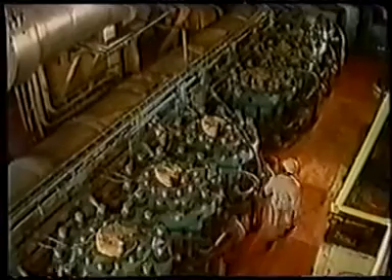The aim of the engineer is to operate the main engine reliably, with low fuel consumption, producing optimum power output, with low maintenance cost, and preferably no breakdowns. The factors which impact on such a successful operation are fuel quality, the correct choice and use of lubricants, and good operational practices, which include an effective condition monitoring process.

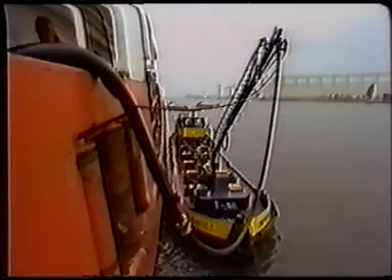In real life, the engineer has to use whatever fuel is delivered to his ship within the laid-down limits. The lubricants available to him are recommended by the engine builders or the lubricant suppliers as the most appropriate for that particular plant. So, both these items are decided for the engineer by others.

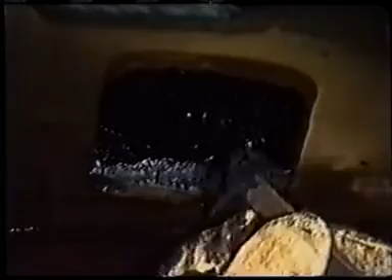The engineer's role begins with his understanding of the processes taking place inside the engine and his knowledge of all the correct operating procedures involved, including maintenance. Understanding these processes begins with a few basic facts about friction, corrosion, wear, and the heat generated by the engine. Knowing the correct operating procedures begins with knowing how to get the best fuel consumption and how to use and store the lubricants on board.

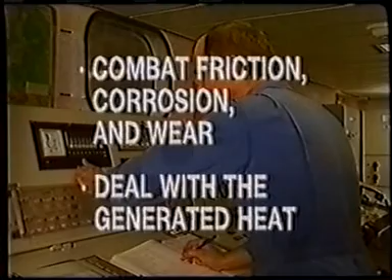The task is to combat friction, corrosion, and wear, and to deal with the generated heat. So let's look at the basics of lubrication in general, but related to the conditions existing in an imaginary main engine. Let's begin with friction. Wherever two surfaces touch and move in relation to one another, there is a force which resists this movement. This force is called friction.

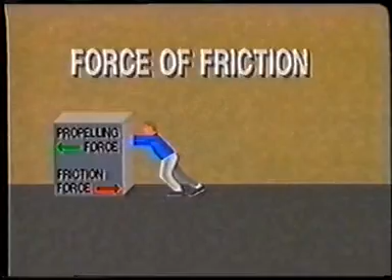Brakes on cars or trains make use of this force to slow them down if they're moving, or to prevent them from moving if they're stationary. Friction occurs naturally everywhere. For instance, between furniture and floor, between piston ring and cylinder liner, even between the hull of the ship and the surrounding water.

Energy must be applied to create movement between these surfaces to overcome the force of friction. Then, more energy is required to accelerate this movement. When movement occurs, the surfaces tend to grind each other down, producing wear. The energy applied to produce the movement will be transformed into heat and motion. The portion of energy used for propelling the surfaces does a job of work, but the portion which simply overcomes the force of friction is wasted energy.

How great the force of friction may be between two surfaces, how much of the energy applied will turn into heat, and how much into motion depends on the pressure one surface places on the other, and on the relative smoothness of the surfaces.

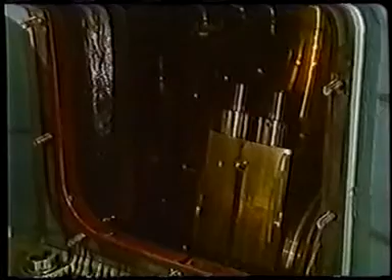The engineer's task in the operation of the main engine is to reduce the friction between moving parts to a minimum, to reduce the wastage of energy, while at the same time preventing the moving surfaces contacting and damaging each other, thus reducing wear. The engineer uses lubricants to perform these tasks. In general, the lubricant forms a film between the surfaces.

As the shaft begins to rotate, the oil wedge lifts it off the bearing surface, attaching itself to each of the surfaces, whilst flowing steadily in the center. This is called hydrodynamic lubrication, which means full fluid film lubrication. When this condition exists, the two moving surfaces do not touch because the oil wedge separates them.

If this film breaks down occasionally due to pressure between the surfaces or excessive heat or lubricant starvation, the surfaces will touch and the lubrication will not be continuous. This is called boundary lubrication. A typical situation where this arises is between a piston ring and the cylinder liner. Hydrodynamic lubrication is more effective because it reduces wear to a minimum. In the case of boundary lubrication, the surfaces may touch and wear may take place.

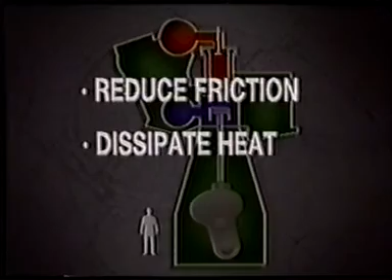Already, several functions for the lubricant have been identified. It must reduce friction, it must dissipate heat, and by preventing contact between the surfaces, it must reduce wear. These functions of lubrication apply across a wide variety of plant operations.

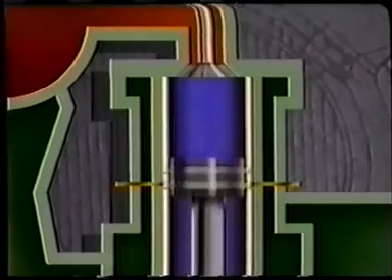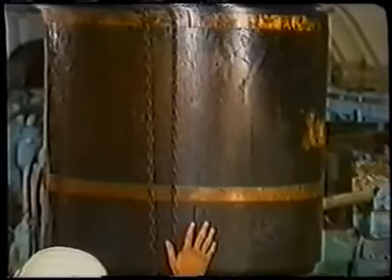To understand how all this is done by the lubricant in a main engine, we need to examine how these various problems arise there. Friction is there as a natural condition between two moving parts. Heat may be present as a result of combustion or as a result of friction. Abrasive wear may be caused by rust particles or metal particles from worn surfaces being trapped between moving surfaces. Also, catalytic fines introduced into the engine by the fuel. Catalytic fines are very fine abrasive particles which enter the fuel during the refinery processes.

Adhesive wear occurs when the boundary lubrication fails to protect the surfaces and spot heat is allowed to build up so that metal-to-metal adhesion takes place, resulting in metal tear and hard particles scratching the otherwise well-machined surface. Adhesive wear is slightly special and only usually occurs in specific areas in special conditions, such as top dead center on the cylinder liner. But because it produces hard particles and uneven surfaces, which help to aggravate abrasive wear, its prevention is equally important.

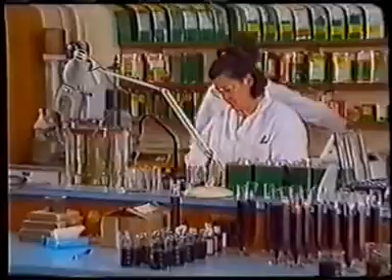Corrosive wear results from the presence of sulfuric acid originating from the combustion processes. Now that we know what problems need to be dealt with, we can establish the properties the lubricant must have to solve them. Marine lubricants are usually liquid or semi-liquid. They may be made of mineral oils, vegetable oils, or synthetic oils. Some additives are also present to enhance certain specific properties which are required for doing a designated lubrication job.

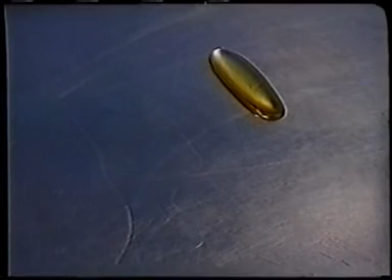For instance, the oil needs to be viscous enough to stick to the surfaces, forming a lubricating film between the moving parts. Why viscous? Viscosity is the liquid's resistance to flow. Water flows fast. Its viscosity is low. Syrup flows slowly. Its viscosity is high. When a liquid flows, it leaves a trail, a film behind. Water leaves a thin film. Syrup leaves a thick one.

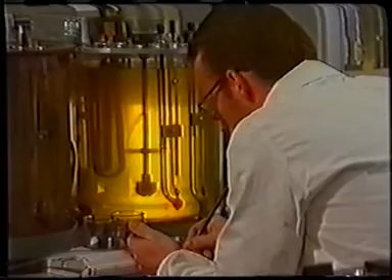All liquids have viscosity, so an oil applied to lubricate some moving parts must have enough viscosity to form the film and flow between the surfaces as they move. In a word, it must lubricate. The viscosity of an oil is measured in a viscometer, which gives the results in centistokes at a measured temperature. This then allows for its classification by an SAE or an ISO number. SAE stands for Society of Automotive Engineers, and ISO stands for International Standards Organization. For example, an SAE 30 oil will have a viscosity at 100 degrees centigrade of between 9.5 and 11.8 centistokes.

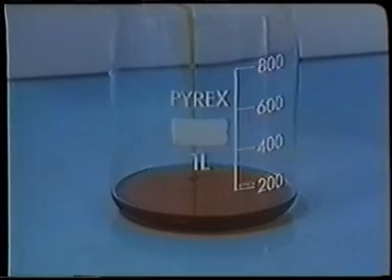This story gets more complicated because the viscosity of a liquid changes with temperature. A slow-flowing oil at 40 degrees centigrade will become a fast-flowing one at 100 degrees centigrade. Some oils change their viscosity more, some less. So a viscosity index, or VI, is used to show how much an oil's viscosity may vary at different temperatures. A low VI number indicates a large change. A high VI number, a smaller change. A 75 VI oil will change quite a lot. A 150 VI oil, much less. It means that when using an oil for a job, its viscosity must be right throughout the temperature range of the job cycle.

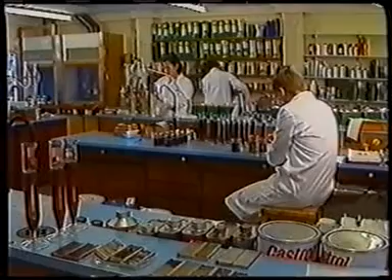The first cardinal rule of good operating practices on board ship is beginning to emerge. Because of the many different lubricants available, with a whole range of viscosity and viscosity index, only the right lubricant must be used for each application. So, such a base oil is ready to perform the basic function of lubrication. This oil will be developed by the use of additives to meet a specific application.

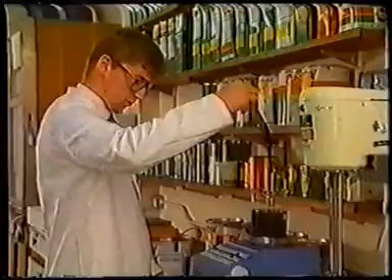For engine application, the oil must prevent wear due to corrosion and deal with the acidic condition inside the engine produced by combustion gases. This is why an alkaline additive must be mixed into the oil to deal with the acidic condition. The oil's total base number, or TBN number, indicates the level of alkalinity present in the lubricant. A low number, such as 15, indicates low alkalinity. A higher value, such as 70, indicates a higher alkaline lubricant.

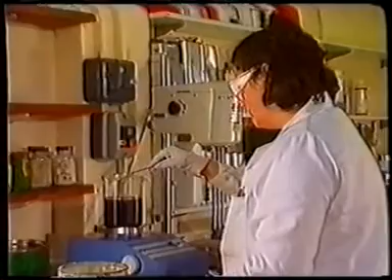When the oil gets hot inside the machine, it absorbs oxygen from the air. Oil oxidation is a problem because when oil combines with oxygen, it thickens and organic sludge and particle deposits may form in the oil. When this occurs in engines or compressors, it can cause serious malfunction. So the lubricant must resist oxidation. Antioxidant additives are mixed into the base oil, and here the oil is tested to find the optimum level of antioxidant additive required for a designed function.

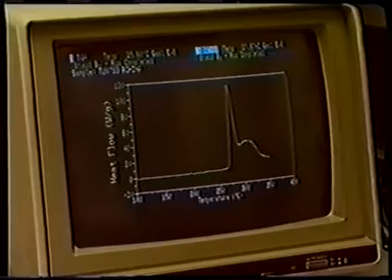Water may enter the engine in various ways and may encourage rust formation on metal surfaces. This is dangerous because rust damages the machined surfaces and breaks up into hard particles, causing abrasive wear, and where it originated, it causes corrosive wear. That is why the lubricant must prevent rust formation and why anti-rust additives are required.

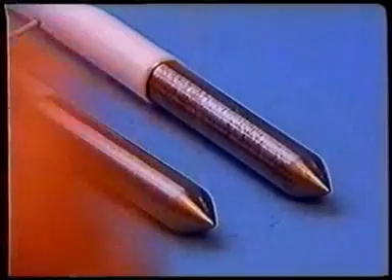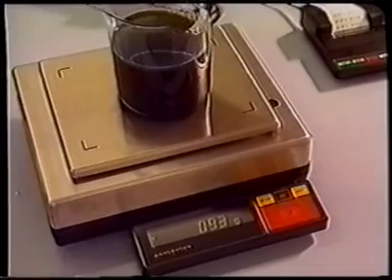The lubricant is churned inside the engine and foam can form. Anti-foam additives lower the surface tension of the oil, bursting the bubbles, allowing the foam to break down quickly. High temperatures and pressures encourage the rupture of the lubricating film, which needs to be prevented if possible. So anti-wear and extreme pressure, EP additives, may be added to the lubricant.

The oil is then subjected to an extreme pressure test. Its effectiveness is tested until destruction, until the test metal parts melt and are welded together.

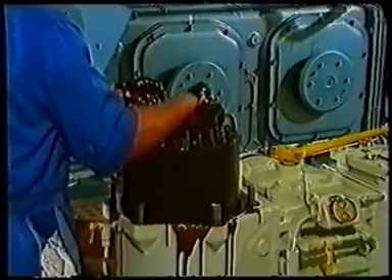Finally, but not conclusively, the contaminating particles need to be transported away from moving parts, and these parts need to be kept as clean as possible. So, detergent and dispersant additives are also added, which help to clean the engine and keep the particles separate and suspended in the oil until they're removed by filtration or centrifuge.

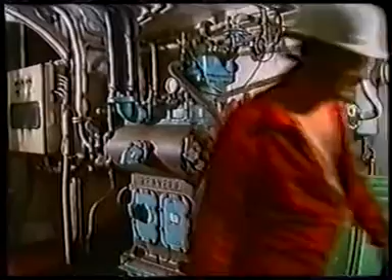So now we are far away from a simple oil used simply to provide lubrication. Each machine will have its own specific set of operating conditions and corresponding lubrication needs. A refrigeration compressor will have completely different requirements for its lubricant from that of a high-performance marine diesel engine.

The cardinal rule of successful operations, as far as lubrication is concerned, is reinforced. Only the correct lubricant must be used in each machine. This is where the lubricant grading and specification systems are helpful. The most relevant ones for a marine engineer are the SAE and ISO grades.

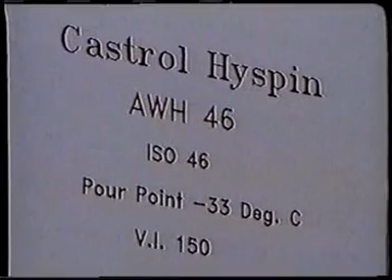Other specifications cover a range of performance levels, such as the API, American Petroleum Institute. Various military specifications require that the oil is subjected to a variety of clearly defined and closely controlled engine tests. Machine manufacturers will also provide a list of recommended lubricants for their products, and these must be strictly adhered to for best performance.

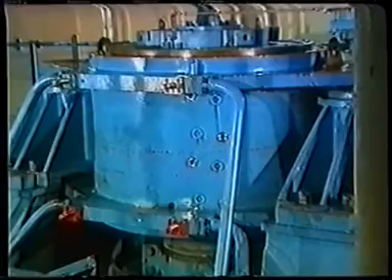On board ship, there are a variety of lubricants used for engines, compressors, transmission units, hydraulic units, turbines, and so on. As each machine will require a different kind of lubricant, they must not be mixed or substituted by any other lubricant than those recommended by the machine's manufacturers.

Lubricants must be correctly stored in a clean environment and correctly handled if they are to perform to their specifications. If they're stored in a cold place where the oil may cool below its pour point, the oil may become solidified. If it's stored near a heat source, it may become heated near to its flash point and become an explosion hazard. Preferably, drums should not be stored on deck, as they might take in moisture, which will reduce the efficiency of the lubricant.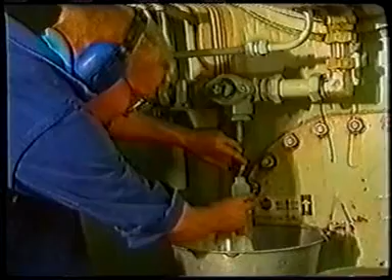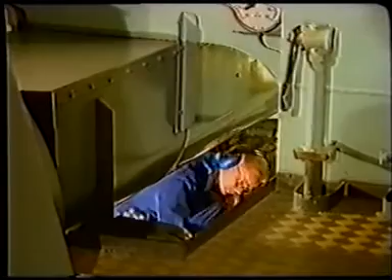The lubricant needs to be inspected and cleaned by filtering and centrifuge during its service life, according to manufacturers' recommendations. Finally, oil samples may be taken periodically from the lubricant in use and sent away for trend analysis to a laboratory on shore. There, the contaminant and metal particles in the oil are analyzed and quantified, and a picture built up of the state of health of the machine using that lubricant. Oil sample analysis is dealt with in greater detail in Program 2.

To conclude, good lubricant management on board ship is vital to effective ship operations. The most important steps an engineer must take in lubricant management are: bulk oil must always be bunkered into the correct tank and in the correct ascending order of TBN value. Delivery notes and oil samples must always be checked to ensure that the right oil has been delivered.

Eliminate water ingress into the lube oil from piston cooling leakages, oil cooler leakages, jacket cooling water entering the crankcase, purifier seal water, and excessive water level on engine tank tops. Check pipework for leaks and failures. Check drains and filter cocks are not being left open. Check tank gauge glasses are not broken, or that reading cocks are not jammed open. Send good lube oil samples for routine analysis regularly.

Most losses and contamination of lube oil result from careless handling. Take great care that you handle and use lubricants correctly. Finally, the cardinal rule again. Only the right lubricant must be used for each application. View this video again and use the accompanying booklet to remind you of these very important basic factors of marine lubrication.

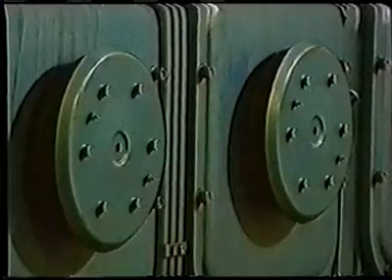In Program 1 of this series, the basic principles of lubrication, the functions of lubricants and their main components were discussed in general terms. From this basic look at lubricants, the most significant rule in marine lubrication has emerged. With so many different lubricants used on board ship, designed for particular applications, great care must be taken not to mix lubricants or use the wrong type for a given application. Serious damage can occur if this rule is disregarded.

This program deals with specific lubrication areas in slow-speed crosshead engines and in medium-speed trunk piston engines to promote good operational practices and to help achieve the best results from the lubricants used. Good operational practices concentrate on the choice of lubricants for each application, the selection of optimum feed rate for cylinder lubrication, and the cleaning and testing of the lubricants during their operational life.

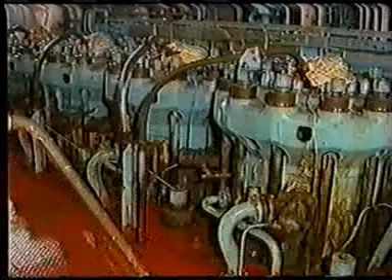The lubrication of a slow-speed crosshead engine involves three distinctly different areas. A, circulating system lubrication, which takes care of the bearings and moving parts in the crankcase. B, cylinder lubrication system, which takes care of the lubrication between the liner and the piston rings. And C, the lubrication of turbochargers, hydraulic governors, hydraulic exhaust valve actuators, and the turning gear. All of these may use different lubricants.

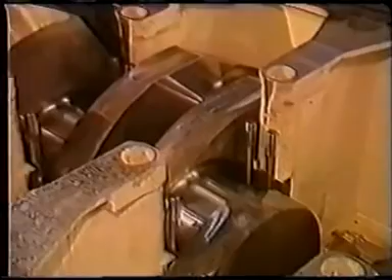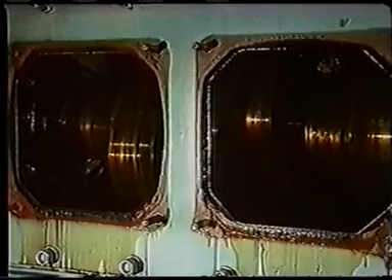The circulating system oil is there to lubricate the moving parts of the running gear and provide the drive for the control system. Typically, this would be an oil of viscosity grade SAE 30, having a viscosity index of between 80 and 100 and a low TBN number. The oil should resist foam formation and possess good water separation characteristics. The engine manufacturer's manual will contain recommended lubricants.

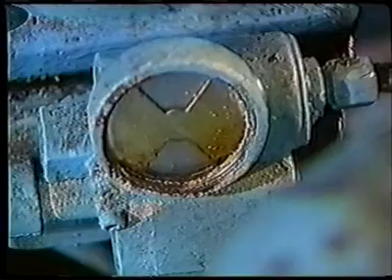Besides lubrication, the lubricant will transport contaminants and metal particles as it circulates, which then need to be removed. This is best achieved in a centrifugal separator, working in bypass, drawing oil from the oil drain tank and returning it there after cleaning. The application of inline filters also helps to remove some of the contaminants.

The ingress of water into the system is always a danger, and frequent checks should be carried out on the system oil to ensure an early detection and removal of water. This is most important, as the presence of water increases the risk of corrosion as well as microbial contamination of the oil.

The water must be kept out or removed totally as quickly as possible from any system oil. Again, systematic centrifugal cleaning will lower these risks. Typical sources of contamination may be leakage from the cooling system and from the centrifuge sealing water if not operated correctly.

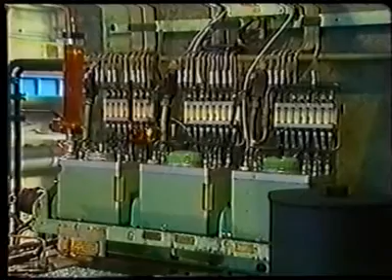The cylinder lubricating system uses a different type of lubricant, as the job it is required to perform differs from that of the system oil. The cylinder lubricant must be of a higher viscosity so that it can form a good lubricating film between the liner and the piston rings. It must also withstand the heat variations in the combustion area and must deal with the combustion products. Under normal running conditions, an alkaline cylinder lubricating oil of SAE 50 viscosity is used.

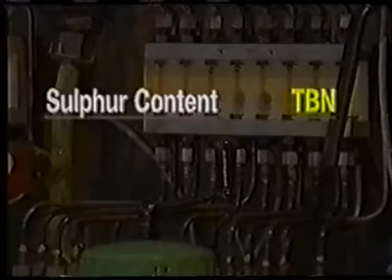The alkalinity or TBN value of the oil is related to the sulfur content of the fuel used. Typical values may be, for sulfur content of 0.5 to 1%, between 20 to 25 TBN. For higher sulfur content over 2%, the TBN number may be 70 or higher.

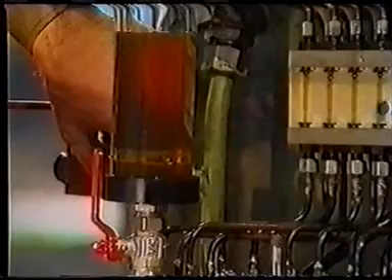Once the correct cylinder oil is chosen, the correct feed rate must be established in accordance with the engine builder's recommendations. The feed rate has a critical effect on good engine operation, apart from the question of oil consumption. With too low a feed rate, the danger of the oil film breaking down, causing undue wear, is much increased. The correct feed rate will allow the formation of the lubricating film between the liner and the rings, and will reduce the effect of its breakdown at piston reversal points.

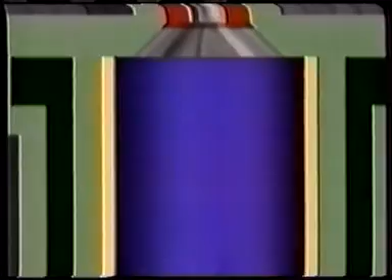The use of heavy fuel oil with high sulfur content is making the job of the cylinder lubricant very difficult. Even high alkalinity oils cannot hope to neutralize all the sulfuric acids which are produced during combustion. The cooling system must be operated so that the cylinder liner temperature is not dropped below the temperature at which the sulfuric acid may condense out on it.

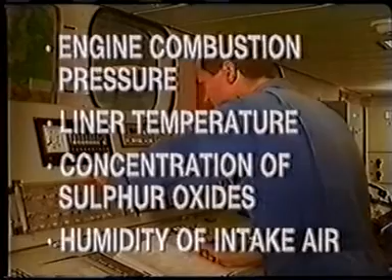Acid condensation depends on the engine combustion pressure, the liner temperature, the concentration of the sulfur oxides, and the humidity of the intake air. So the engineer must ensure that the moisture content of the intake air is meticulously controlled, and that the temperature of the cylinder liner is kept high enough to prevent acid condensation.

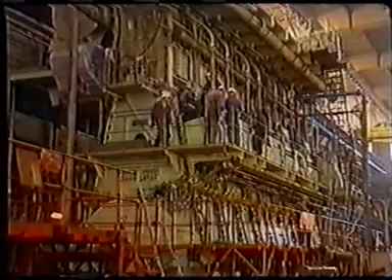The way an engine has been run in after commissioning or an overhaul is critical to establishing good cylinder lubrication. A good run-in procedure will create a good wear-in of the cylinder liner and piston ring. A good seal is obtained between them where a thin oil film provides reliable and effective lubrication. To achieve this running-in performance, a running-in cylinder oil may be used.

The period of running in should be decided upon in accordance with the engine manufacturer's recommendations. Even if only new rings have been fitted, the running-in procedures should be as near as possible to that recommended for new engines. During the running-in period of a new engine, the feed rate should be high. After running in, the feed rate is gradually adjusted until the recommended feed rate is reached.

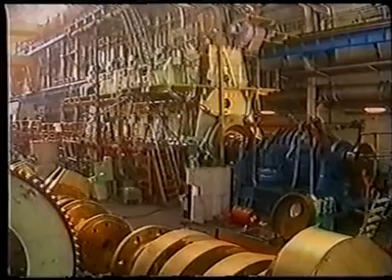The use of the correct lubricant and the correct feed rate for the engine load will help to achieve the best results from a cylinder lubricant. The lubrication of ancillary equipment of the main engine will be discussed in Program 3.

Due to vital design differences, in the case of medium-speed diesel engines, the cylinders are open to the crankcase. This means that the crankcase oil can be contaminated by corrosive combustion products. The chosen system oil must deal with these contaminants as it lubricates the system. The lubricant must also maintain effective lubrication under high mechanical and thermal loads, and must transport solids from the cylinder to the cleaning devices, such as filters and centrifuges.

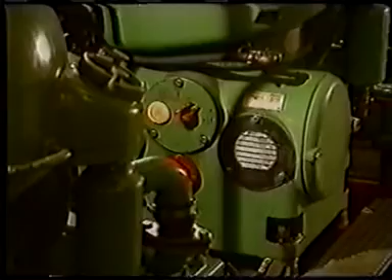It must withstand heat as it fights corrosion and wear. In doing this, it must resist oxidation and thermal breakdown, and must keep the engine clean. Some medium-speed engines, in addition to high load factors, introduce new problem areas for the lubricant to deal with, such as piston undercrown deposits, ring zone fouling, and cylinder bore polishing.

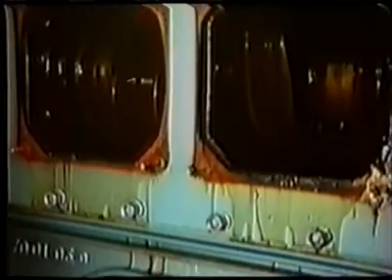So the lubricant must also have increased dispersancy, detergency, higher oxidation, and thermal stability. It must also have higher load carrying capacity to avoid scuffing problems of cams and rollers. The aim is to maintain effective lubrication at all times throughout the machinery.

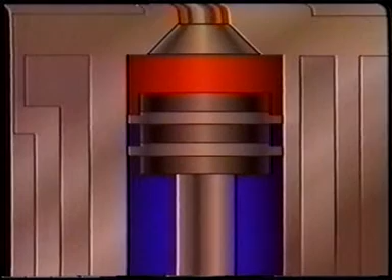Inside the cylinder, the thermal and mechanical stresses on the oil film peak due to combustion while the piston speed is 0. The oil film can break down easily, and the best the engineer can hope for is sufficiently effective boundary lubrication at this point.

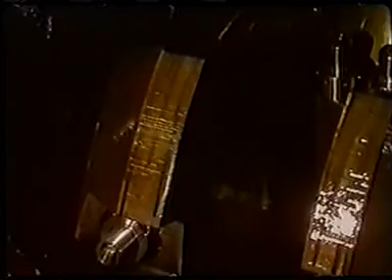In medium-speed engines, the circulating system oil is also providing cylinder lubrication and piston cooling, and the breakdown of the lubricating film between the liner and the piston rings tends to cause blow-by, which results in further contamination, including unburned fuel. Unburned fuel contamination tends to reduce viscosity, leading to less effective lubrication. The main source of fuel contamination is a leaking fuel injector.

A typical lubricant which will successfully lubricate the entire engine is an SAE 40. The oil will generally be designed with additional alkalinity, detergency, dispersancy, with antioxidant and EP additives. In all cases, the engine manufacturer's recommendations should be strictly adhered to. Some medium-speed engine designs use a separate cylinder lubricant, but in almost all cases, the system oil is used for cylinder lubrication.

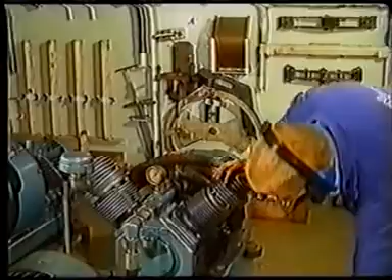Lubricant care is a critical factor in good machine operation. The conditions of storage on board, prevention of contamination by water and hard particles during storage, the cleanliness of the machines when charging them with lubricants, and the continuous filtering and cleaning of the lubricants during use are equally important phases of looking after them.

There are many filter types used on board ships, and their periodic cleaning and monitoring according to manufacturers' recommendations is essential. Medium-speed installations use back-flushing or self-cleaning filters. Pressure differential between inlet and outlet triggers off back-flushing. If difficulties arise with this type of filter, for instance, frequent back-flushing, the filter elements should be dipped into chemical cleaners which are capable of dissolving and removing hard calcium compound deposits. Or an ultrasonic bath may be used for cleaning them.

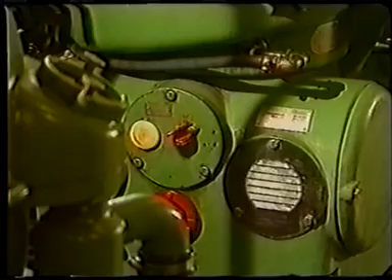Filtering the lubricants will only remove some of the contaminants, usually the larger hard particles. The lubricants need further cleaning, and the use of purifiers for this work is common practice. These will remove particles as small as 0.5 microns and remove most of the water content.

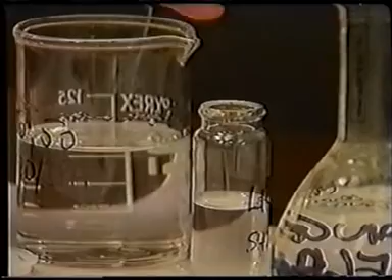Increased use of lubricant condition monitoring and wear metal particle analysis greatly reduces operating costs, as the resultant trend analysis usually highlights impending problem areas before breakdown occurs. The savings come not just from avoiding unexpected breakdowns and their consequential costs, but from being able to eliminate problem areas before they contaminate the lubricant, forcing its untimely replacement.

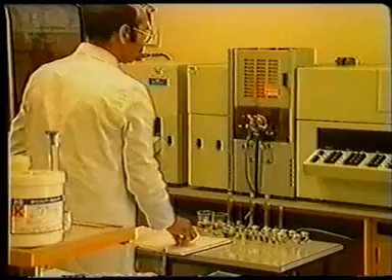The combination of wear and contaminant elements usually points to specific developing problems from which practical recommendations can be built up, reducing the need to open up the machinery for inspection or discarding lubricants before their time. The main items which are checked during analysis are flash point, viscosity, water content, alkalinity, and metal wear particles. The resultant values are then compared with those of the new oil to detect major changes.

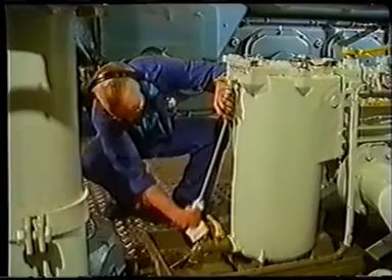For the oil analysis to be effective, the job must be done using good representative samples taken preferably after the pump, strainer, cooler chain, before the oil re-enters the engine. In any case, the samples for trend analysis should always be taken from the same point in the system. The method of taking the sample, as well as the utensils used, must be such that contamination of the sample is avoided.

In the laboratory, the lubricants will be examined for the presence of combustion contaminants, as well as for metal debris against established control values. Increasing trends and their combinations will allow the required remedial measures to be formulated. Modern lubricating oils, when carefully monitored and maintained in good condition by the engineer, can have an almost infinite life. Even if this optimum is not always achieved, extended oil change intervals will reduce used oil disposal problems with significant cost and environmental benefits.

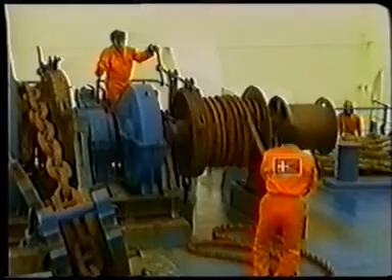The lubrication of ancillary equipment on board ship is just as vital as that of the main engine, as some of the ship's control systems, such as the steering gear, rely on hydraulic pumps for their efficient service. Refrigeration plants, deck machinery, gear transmissions, cranes and ropes all have their own specific needs as far as lubrication is concerned.

The cardinal rule that was established in Program 1 about lubrication is that each specific lubrication job requires its own lubricant, specially designed for that job. Lubricants must not be mixed or the wrong lubricant used, because disaster is likely to follow in either case.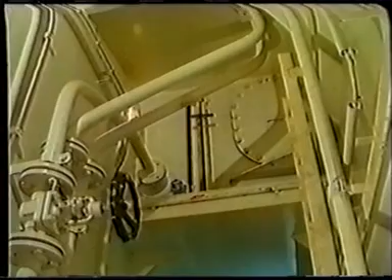On today's vessels, most tail shaft bearings are oil lubricated. The stern tube is filled with oil and a static pressure head is applied via a header tank. The height of the header tank is calculated to ensure that the pressure head of the lubricating oil will always be higher than that of the seawater outside. Failure of the outer seals will thus always result in loss of oil rather than seawater ingress.

As far as the lubricant is concerned, only oils which are fully approved by the manufacturer should be used, to avoid using products which may be incompatible with the materials used for the shaft seals. The engineer should pay regular attention to the level of the stern tube oil header tank to monitor any leakage from the stern tube outer seals.

In the case of heavy leakage, the engineer must decide the point at which he believes an emergency situation exists. At this point, he should introduce any heavy oil available to him on board the vessel, for example, an SAE 50 cylinder oil. This will slow down the rate of leakage and allow him to reach port where repairs may be effected. In the event of him calling at a port prior to the repair port, he should ask his oil supplier to deliver a very heavy stern tube oil.

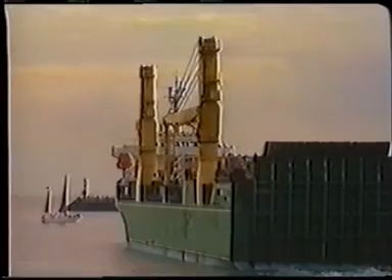Regular samples should be taken from the stern tube oil from the sampling cock, having first allowed a reasonable quantity to be drained off to ensure a good representative sample. The oil should be tested for water content and for wear metals content, since all of the classification societies now use wear metals trend analysis to assess the condition of the tail shaft bearing.

The steering gear on an ocean-going vessel gives a classic example of the simple hydraulic system. If the vessel is fitted with a rotary vane system, the stator is fixed to the ship's structure and the rotor to the rudder. In the annular space between the rotor and the stator, fixed vanes are fitted, secured equidistantly around the outside of the rotor. They form two alternative pressure chambers, each connected hydraulically by a manifold. Oil is then delivered under pressure to one chamber or another, turning the rudder in the desired direction.

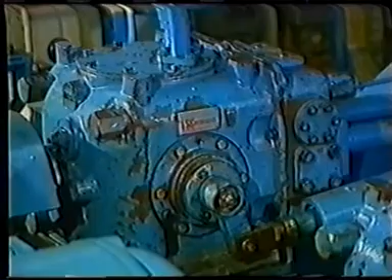The hydraulic fluid in a steering gear system is not subjected to undue stress. Hence, a good quality hydraulic oil of the correct viscosity will suffice. It is important that the viscosity requirements of the hydraulic pump manufacturer are observed, and that the oil is kept clean and free from moisture. So long as the system is leak-free, there will be little makeup required, but it's essential that frequent and regular checks are made on the reservoir level indicator.

Equally important to the steering gear is its control system, usually known as the steering telemotor. This is also a simple hydraulic system where the hydraulic pressure is applied by the helmsman turning the ship's wheel, or more commonly in modern ships, by an electrically driven motor controlled by the automatic pilot. The hydraulic fluid is transmitted through a long length of small bore piping. Hence, fluid friction becomes an important factor.

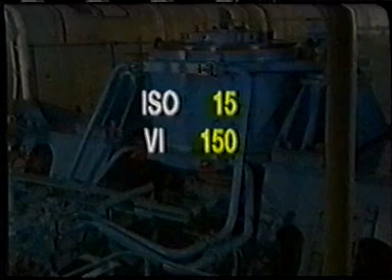Since instant response is required, it's necessary to use a hydraulic oil with the lowest practical viscosity and with the highest practical viscosity index. This can be satisfied with an ISO 15 oil having a VI of 150. By virtue of its high VI, the oil will have a low pour point of around -50 degrees centigrade, also an important factor.

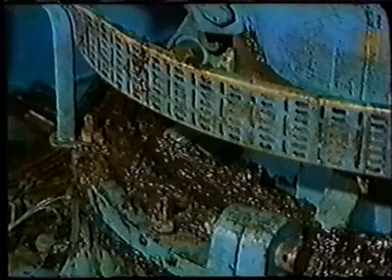The steering flat holds another lubrication area, and that is the lubrication of the rudder stock bearings, particularly the carrier bearing. Unfortunately, conditions in the rudder carrier bearing will never permit anything other than boundary lubrication, and the lubricant used is normally a grease containing load-carrying additives. The rudder stock bearings carry little load, but they do need lubrication to protect against wear from vibration. The upper and lower bearings are both lubricated from the carrier bearing lubrication system.

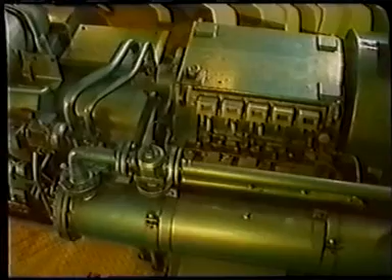There are a number of different types of gearboxes on board ship, ranging from the large gearing required for main propulsion by medium-speed engines, the open gears on the windlass, to the very heavily loaded gears on the purifier drives. Each requires a different lubricant. Main propulsion gears are not heavily loaded, and for this reason, in most cases, the main engine oil can be used in the gearbox.

On very heavily loaded gears, it is not possible to maintain hydrodynamic lubrication between the gear teeth, and metal-to-metal contact can occur. To overcome scuffing of gear teeth under such conditions, the gear oil is fortified with additives, usually a combination of sulfur and phosphorus. These additives react with the tooth metal under the high temperatures generated by metal-to-metal contact to form a protective metallic film. Such oils are classified as EP, extreme pressure oils.

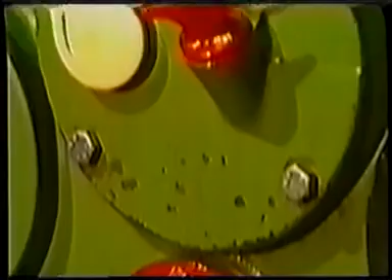When high tooth loading is combined with very high temperatures, then standard EP oils may not be sufficient. For such cases, it may be necessary to use synthetic-based oils, and a typical requirement arises for the lubrication of certain purifier gearboxes. Special compressor oils have been developed for use in certain designs of air compressors.

These oils have to lubricate compressor pistons or vanes where high temperature and high pressure exists, and where air humidity can condense into water droplets. These oils must have a good antioxidation stability. The oils must also have a good air separation ability and an anti-foam additive. Extreme cleanliness must be exercised when charging lubricants into compressors. Because there is a tendency for carbon buildup on valves and valve seats, often synthetic oils are used as base oils for compressor lubrication.

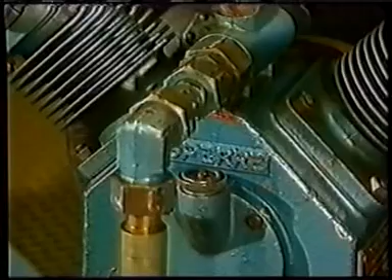Deck machinery is exposed to a wide range of climatic conditions, and the lubricants used must be able to operate under great temperature variations. This is particularly true for the hydraulic oils used in deck winches and cranes. The hydraulic oil must have very low pour point to allow the winches to start turning under Arctic conditions, and it must have sufficient viscosity for satisfactory lubrication under tropical conditions. This is achieved by providing a hydraulic oil which contains viscosity index improvers to give a VI of 150 minimum.

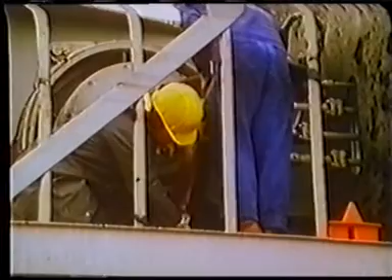At sea, the deck machinery is exposed to sea spray, so open gears and wire ropes need to have good protection against corrosion. For this purpose, special protective greases have been developed, and it is for the engineer to ensure that they are adequately applied.

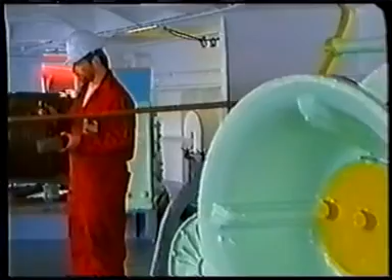In all modern refrigeration systems, the refrigerant is a Freon-type product, often R22, and the lubricant has to mix with the refrigerant in the compressor. Although oil separators are fitted on the outlet side of the compressor, there is always a certain amount of lubricating oil carried over with the gas into the evaporator coils, and then back to the compressor. For this reason, refrigerator oils have several critical requirements. They must be moisture-free, they must have low pour point, and they must be compatible with the refrigerant.

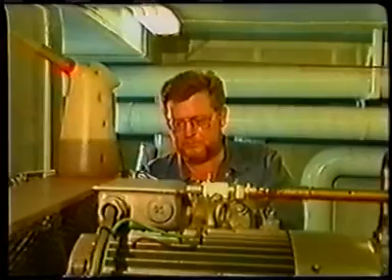The latter point is indicated by the critical solution temperature of the oil. This is the lowest temperature at which the oil is fully miscible with the refrigerant. If the temperature in the evaporator drops below this temperature, the oil may drop out of solution and the evaporator will become oil-logged and the plant will fail. Synthetic oils have lower critical solution temperatures than mineral oils do, and they are more often specified for modern, highly rated installations.

Because refrigeration oils must be moisture-free as well, it's most important that they're ordered in small containers and that the containers are completely emptied on each occasion. Partly used containers will allow the oil to absorb moisture from the atmosphere. We have established already the cardinal rule of lubrication on board ship. Only the correct lubricant must be used in each machine. This rule is vitally important in the case of refrigeration plants.

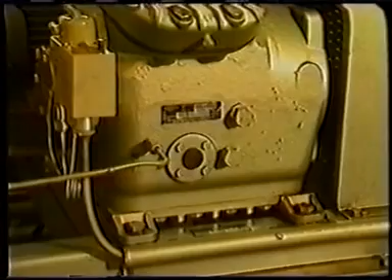Lifeboats and emergency standby systems, which are usually driven by diesel engines, are subjected to intermittent use. These machines are relied upon to work perfectly when necessary, whilst idle most of the time. The lubricants used in them must be capable of protecting the equipment against corrosion, while at the same time providing lubrication instantly. For this reason, they invariably use a multigrade oil.

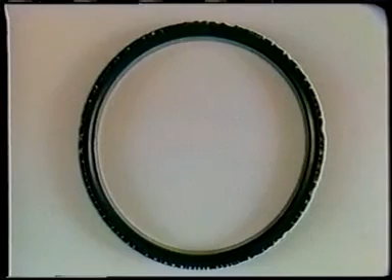Not checking that enough lubricant of the right quality is always available in the machinery under your care, or using the wrong lubricant in a machine, will result in catastrophic breakdown of bearings, gears, pistons, or liners. These examples will remind you of the importance of choosing the right lubricants, storing and using them correctly, and monitoring their condition as well as their available quantities regularly. In short, ensuring that the machinery in your care is well lubricated at all times.